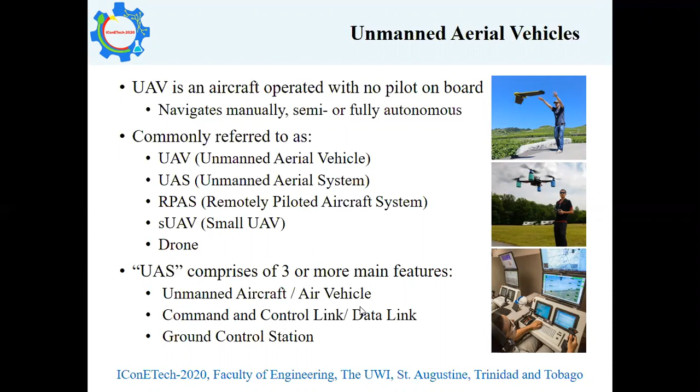People refer to them by different names for different historical reasons. The most common ones are drone or UAV, or more recently UAS. That's because it is a system containing more than just a vehicle. The interest in the UAV started a long time ago, basically for military applications and training. Only in the last two and a half decades have people had a growing interest in UAVs for civilian applications.

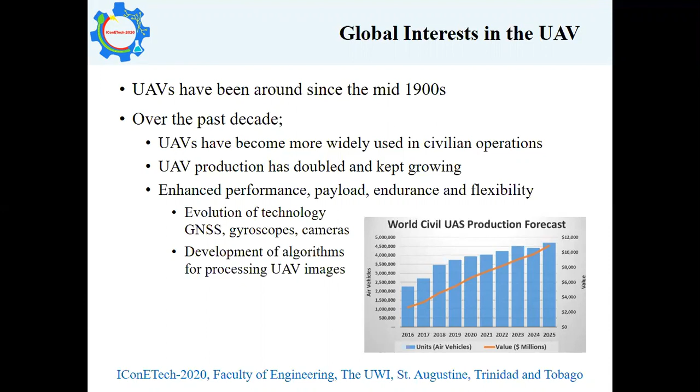Actually, the production of UAVs themselves more than doubled in the last 2 decades. The main reason for that interest is enhanced performance. Now they have smaller and more efficient GPS, gyroscopes and cameras. And also there are more sophisticated algorithms for processing the images, so lay people can get the outcome without too much training.

Other reasons for the popularity of the UAV: it's cost-effective in almost every application. Besides, it's portable and quick to deploy. Take it, put it in the car, move around, set it up and fly it again. And it can be used in very high-risk situations and inaccessible areas.

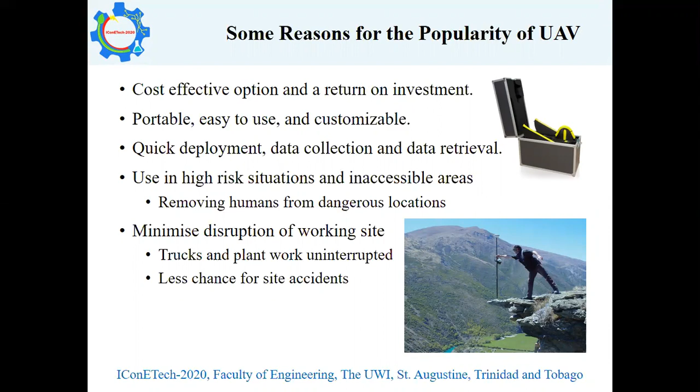As relevant to this study, it minimizes the disruption of the working site. You don't need to stop the trucks to do your measurements. You don't need to wait for them to stop to do your measurements, and it reduces the chance of site accidents for the surveyors and other workers.

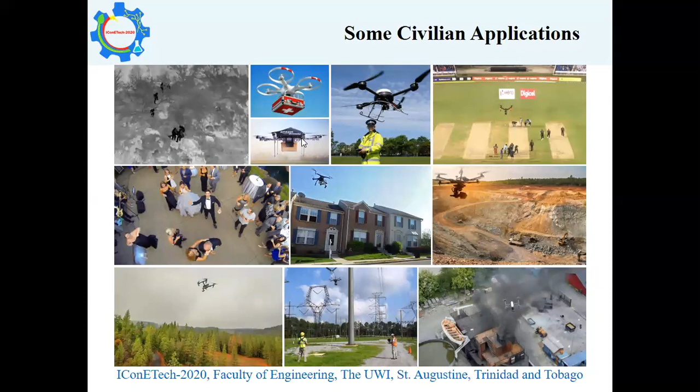Other civilian applications for UAVs: search and rescue, one of the famous applications; policing and monitoring, controlling traffic, the second largest application of UAVs. More relevant to natural resources is mining, forestry, infrastructure, especially power lines, disaster management, not so scientific applications like filming weddings, delivery of medical and other material, which is getting there now, and sport.

Back to our topic here. Obtaining volumetric data for earthwork is a very important task for many civil engineering applications, especially highways, construction, mining, and other things. The way they deal with it now, you take a measurement of the surface, you add another layer or remove some material, and then take a measurement of the second surface, and you subtract the two surfaces to get your volume, typically using total stations or global positioning systems.

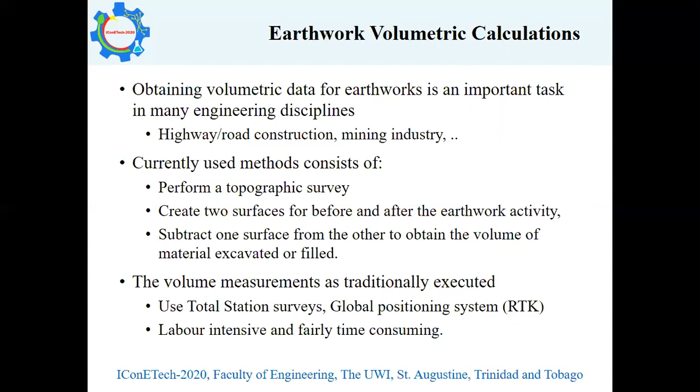And as you would expect, this is labor-intensive, time-consuming, and puts the surveyors in danger working between the heavy machinery. So what we're promoting and proposing here is the use of UAVs for that task. And we'll be evaluating its performance against total stations in terms of accuracy, cost, and timing.

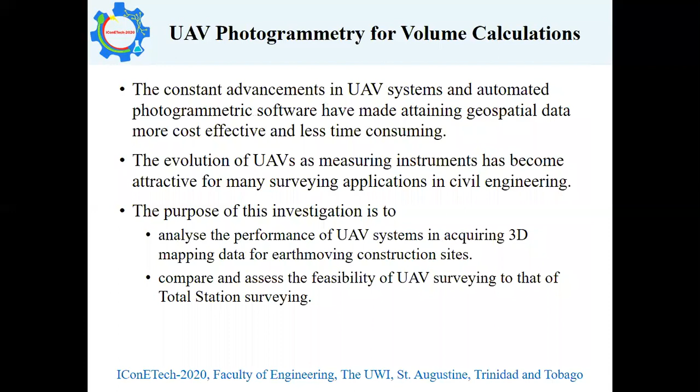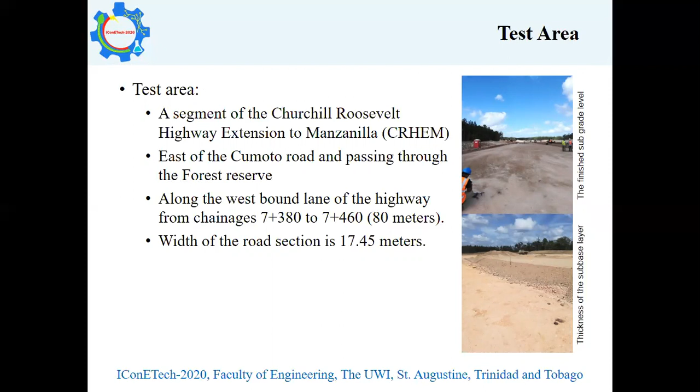We flew our first mission, took pictures of the surface, and then they put the sub-base material, compacted it, and we flew our second flight mission. The idea is that we compare the volumes between the two surfaces. Of course, the project went through the normal procedure: we went to the site visit, evaluated the danger, safety, and tree lines affecting our flight, and we designed our flight.

Meanwhile, we collected the ground control points around the section, and we flew the UAV and took several images. In the first mission, we flew more than we needed, so we collected about 160 photographs, although we used about 50 photographs for the process. Then we decided to cut down the number of photos, and the second mission took only about 34 images.

We took the photographs and put them in the software, a very commercial and mainstream software, and the software went through the whole process of orientation and aerial triangulation, and finally produced a dense set of three-dimensional points, millions of them for each mission, about 4 million to 20 million, that's plenty. We changed the setting.

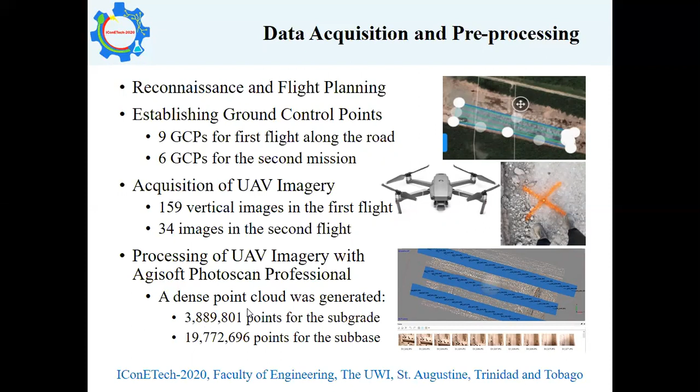So after that, we should create the two surfaces to compare to get the volume. So we use the points that are collected from total station, and that's over the same section. At the subgrade level, we collected slightly more points than on the sub-base level. That's about 10 meters distance between these points.

We use the triangular irregular network method. That's a TIN, and we generated surfaces, digital surfaces from there, and we subtract one from the other one. We use the UAV image data, the points that we collected from the UAV, and couldn't use the millions, so we filtered them down to about 120,000. That gave us about 15 centimeters between every point.

And that's going to give us about 4,000 points instead of 4 between every total station points. So that will give you the amount of data that we get from there.

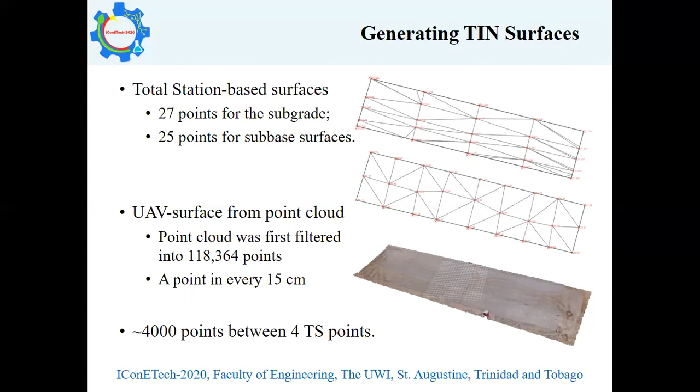So now let's do our analysis, evaluation of the accuracies. Our input was ground control points using GPS. The accuracy was about 2 centimeters or 3 centimeters in X and Y, and less than 1 centimeter in Z. So that will tell you that that's the starting point. We started with 2 centimeters accuracies in X and Y. Those control points were same accuracy applied to the total station points, and then these control points were input into the aerial orientation of the aerial photographs.

So first evaluation was to see our total stations versus the interpolated surfaces as a point. So we took these 27 and 25 points collected by total station, compared their values with their values on the interpolated relevant surface from the UAV. And we end up about 4 centimeters average error. Well, that's very good within the expectation of the project.

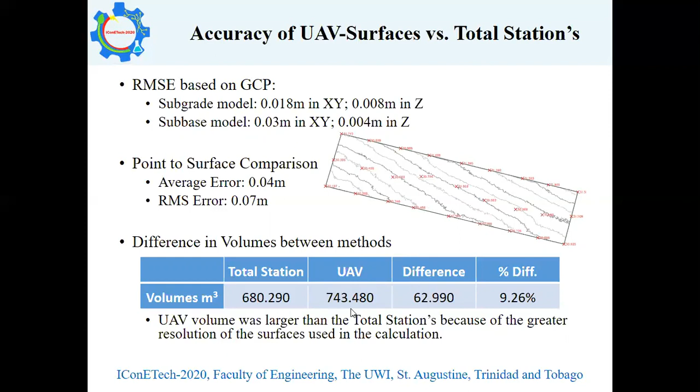Now, our explanation for that difference is that having 4,000 points instead of 4 points in every square here will give you a better representation of the actual surface of reality. And all smaller variation in the surface between these points will be captured by the UAV data. So our conclusion in this task is that you get a better, more accurate and more realistic representation of reality, and the volume here should be more representative of reality.

Then we compared the time. It was not that big difference between them in the field, being about 10 minutes. The difference was in the processing of the data, and we should expect with the aerial photography, we have more time to process the data, and we have more points from the UAV to process compared to the total station. So there was a big difference in time. The UAV took longer time to process.

However, we would like to mention here that in the data collection part, if you have a larger site, which typically you do, you will take longer time to do the total station field work. And that will be more gaining for the UAV here. In terms of the processing, of course, we can reduce the number of points used by the UAV, and at the end, we're still having a better, more dense representation of the surface. So what you gain from the extra time, you get more accurate results.

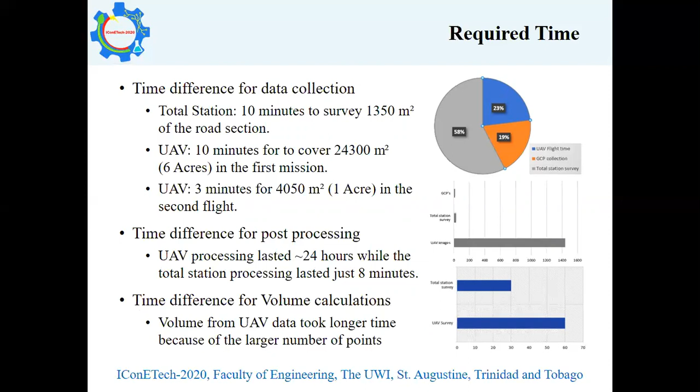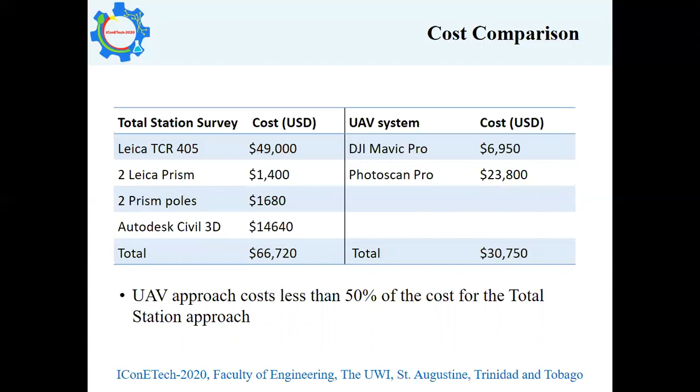And finally, we compared the cost. We didn't compare it per project, but we used the purchasing cost as an indicator for the difference here. And you can see here the purchasing cost for the total stations and all accessories is around 60-something thousand US dollars, while for the UAV and the processing software is around 30,000 US dollars. And that's already 50% saving on the cost. If you want to prorate it over a project, we still have the same difference.

So in conclusion, we proved that the UAV is more appropriate, more cost-effective, and time-saving to do earthwork measurements for earthwork calculations. We achieved the accuracy within the project specification. They were asking for 5 centimeters, and we get 4 centimeters. We proved also that the UAV is more accurate in presenting the reality of the surface, and as such, will be more accurate in representing the actual volume.

We saved on the cost, by purchasing cost and of the operation, and then we expect we'll be saving on the time for field work.